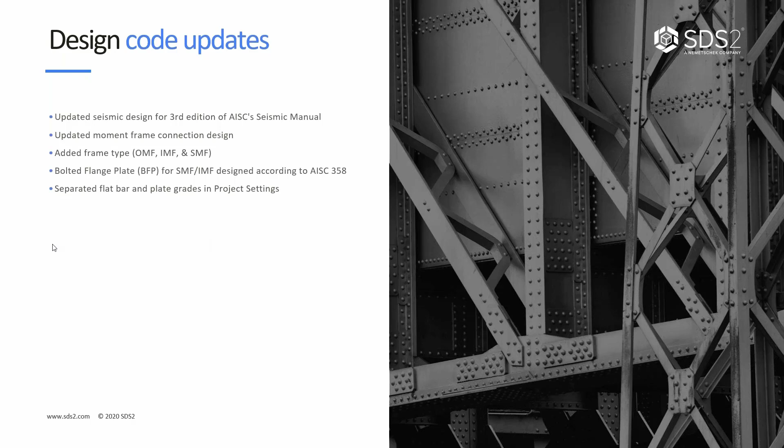They, or the EOR, will typically provide in the design drawings the size of the knife plate, hole locations, and different things like that. And then the shear plate to attach that to in the field and connect everything up is going to be provided by the fabricator.

So typically, the detailer is going to have to come up with that connection, maybe send it off for approval by the EOR, by Vulcraft, to do that. So not a ton different than your typical connection design, as far as sending stuff off for EOR review and the kind of collaboration and how you have to work with other parties there.

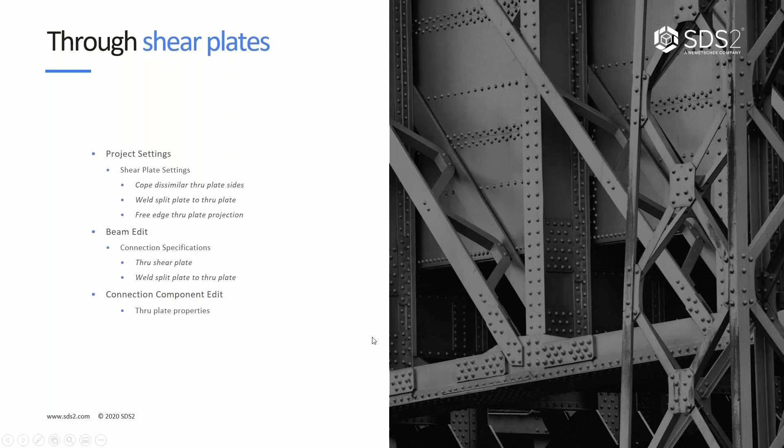be required. Typically when we see these inner flange plates, the reason for that is we can achieve a higher capacity connection because the bolts are now in double shear versus just a single shear plane. So that's typically why we would see those inner flange plates. Again, Colin, anything you'd like to add on this one?

The only thing I would add on this one is that if your two column section sizes do require fill plates on the inside of the flange, those will be non-bearing fill plates, so you'll see them set back a little from the end of the column. Okay, good to know.

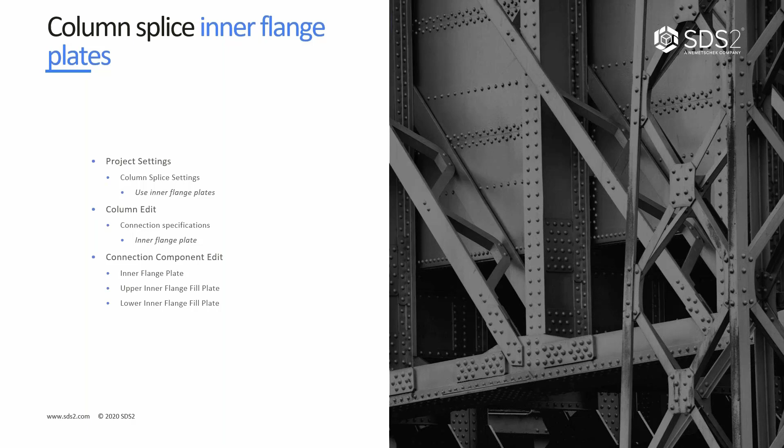Keep in mind here, in this situation, we are only doing shop welds. We don't support the field welds yet in this case. So if you do pick a combination of those settings that would result in field welds being required, you may see a failed statement. We've added several new failed statements to account for that and give you the information on why we're not doing those yet.

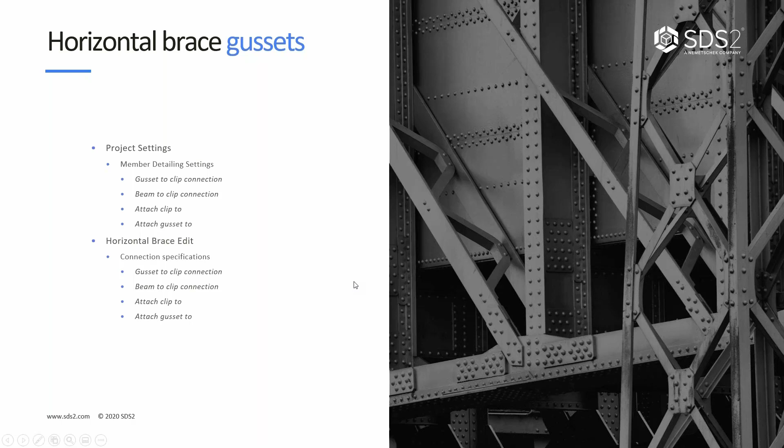One of the big things also that was an issue in the past was we were using an HTML format that, depending on the web browser you opened those calcs with, you would have potentially seen some formatting issues, and the formulas and such may not have looked 100% accurate. And that was limitations of your web browsers, whether it have been Mozilla Firefox or Google Chrome or which version of that you were using. With PDF, we can eliminate those issues and have eliminated those issues.

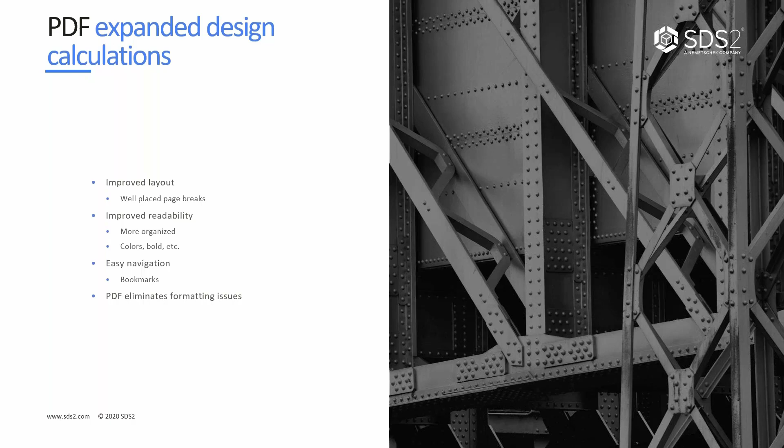So on to the live demonstration here now. Before I do that, Colin, anything else that I may have missed or you'd like to add here before we get to the demo part of this? No, I don't think so. Okay, very good. So I do have SDS2 open here already. I'm going to go ahead and grab that.

So first thing I'm going to touch on here is we talked about just some of the general things. I'm going to go into our project settings. And I mentioned that the plate and bar grades have been separated out. So what that means is when I go to my material grades and I were to look at my flat bar grades, in the past you saw a note down here indicating that it was shared with plates. That's gone now because it's not shared.

And if I just add something in here that's different than the out of the box, I'm just going off of memory here, so don't crucify me if I have my values wrong in there. I think that's pretty close. So let's say I add that A572-60 in here. This was for my flat bar grades. When I come down here to my plate grades, that is no longer included in here because these are completely separate tables, can be used completely separate for plates versus flat bars.

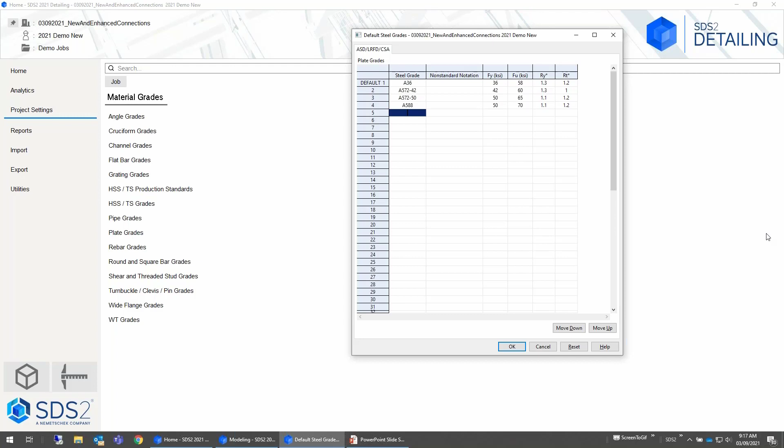So the plate and flat bar grades have been separated. Next thing on our list is talking about those flush framed joists. First I'm going to go into the shapes properties and show you what that looks like. When I open the shapes properties, I'm going to open my local shapes properties for this particular project. It's going to take a minute to load, as it typically does - there's a ton of information coming in there.

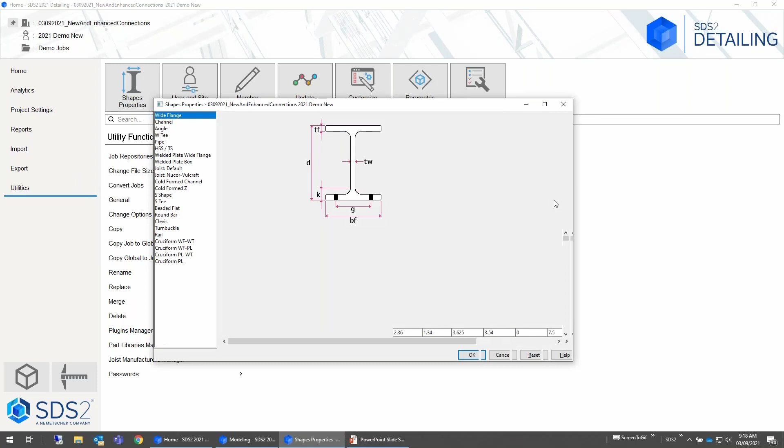What we're going to notice in here, in the past you typically had your joist type that you could select. So under my joist, I have the joist type. We've added now the CJ joist type in here to get that CJ series. If I do a find for CJ, hit next match, we can see these are included in here.

If these are not included in here, you may have to go into this joist properties file and run an import for a file that we do include. Let's see here - there we go. So we have a joist manufacturer's plugin folder. We go into the Vulcraft folder and we would import that joist properties Imperial file, and that would populate that material file with the CJ series joist that we have included so far.

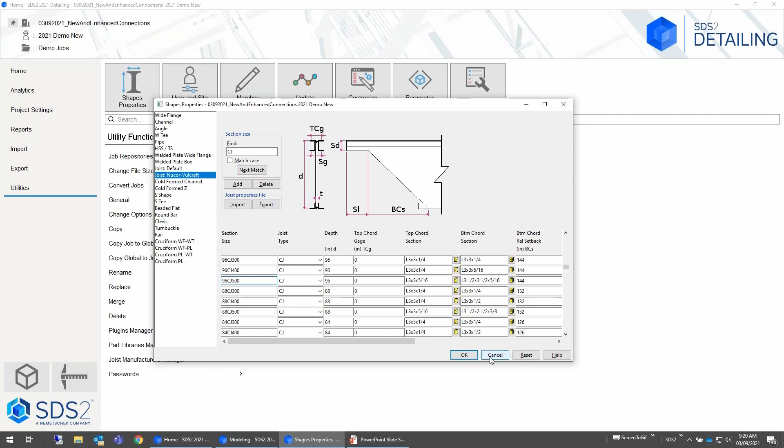Keep in mind, you do need to have the joist manufacturer set up properly in your project settings. So that's under modeling, joist manufacturers - I need to have the joist manufacturer set to Vulcraft within here. You can also set that manufacturer at the time you create your job. In the new job screen, there's the joist manufacturer option within there as well to get that done.

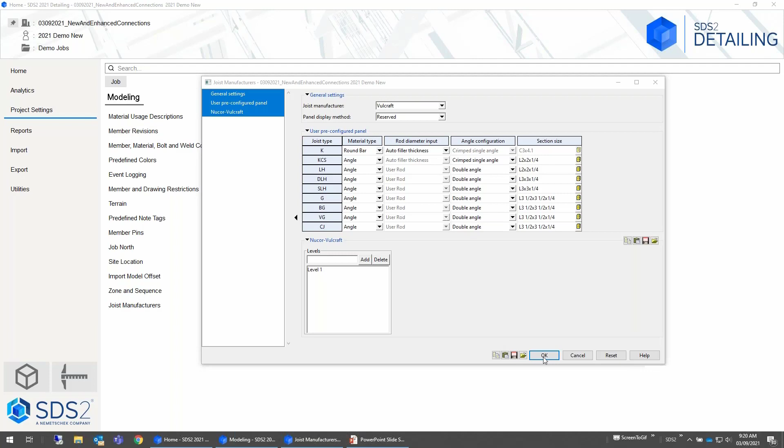If you don't see the joist manufacturer here, then in our utilities we have a joist manufacturers manager that we can use to move the valid manufacturers over to the job manufacturers to get that included in there as well.

Moving on then to more project settings related to this - in our bolt settings, new things that we've added: you're going to notice CJ joist bolts that we have in here. So we have a 3/4 inch by default A325N for the CJ joist bolts.

You'll also notice we have a flush frame joist connection in here. This one is set to 1 inch as the diameter by default - that's the preference of Vulcraft, so that's what we have set up there. And bolt type as well, we can change that. If you coordinate with Vulcraft, it's possible they may accept a different bolt diameter, but that is their current preference, the 1 inch bolts.

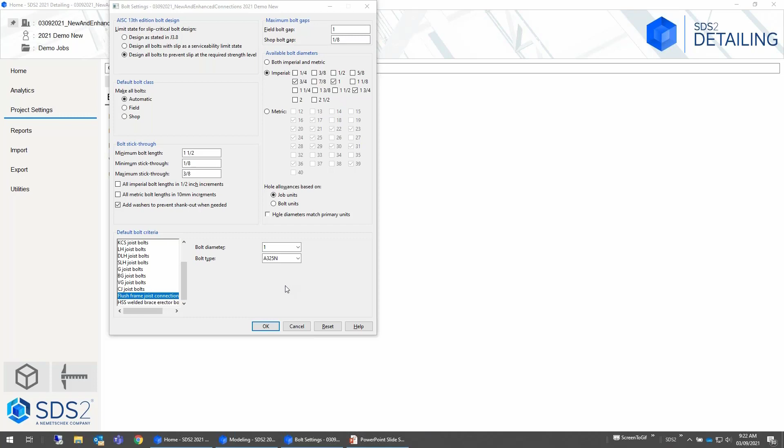Then the next thing we have some additional field clearances that have been added. So remember from yesterday's webinar, if I do a search in here and just type field clearance, I can come up with some field clearance keywords. Within the joist connections, you'll notice you have a knife plate field clearance now, so that's controllable there.

Also, if I clear my search here, in our standard fabricator connections under the joist connection settings, I have a full section for the flush framed connection. So you have your knife plate thickness, horizontal edge distances, minimum number of rows, top of steel - we can match that up to the connections in the design drawings that have been provided here to get those default options the way that we need them to be.

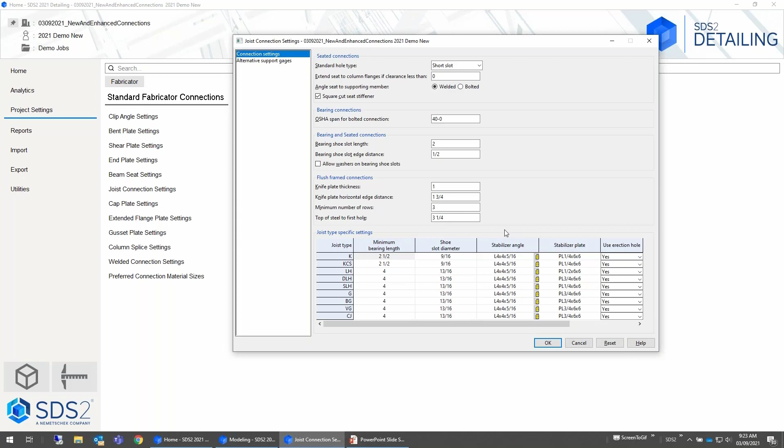So, okay, hopping into the model then to kind of show this a little bit. I have just a little bay over here, got a bunch of joists in there. First thing you're going to notice is I do have a CJ series joist in here, so we have that. You'll notice in the input connection type that I have that flush framed shear option.

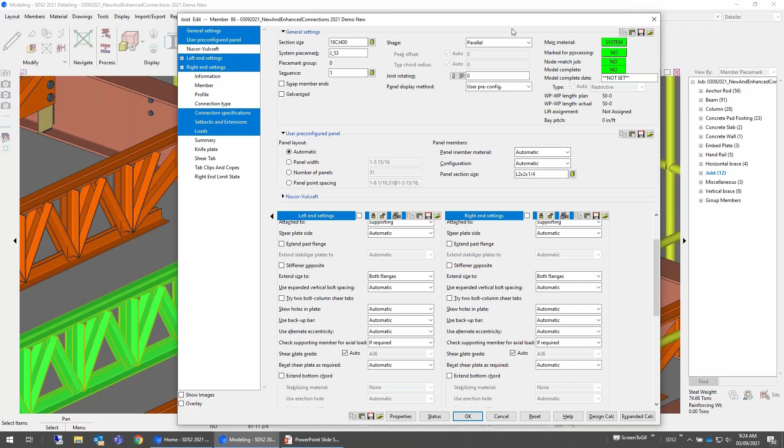When I do have that flush frame shear option selected in the connection specifications, I have all the same specifications as I would if this was just a regular beam shear tab. So we could, you know, add stiffeners on the opposite side of the beam we're framing to, different things like that.

One thing I do want to point out here is you'll notice that all these are full depth shear tabs. So when you pick your flush frame joist or flush frame shear connection type, SDS2 is going to set this extend size to both flanges by default. And again, reason for this is it is Vulcraft's preference to design that always as a full depth shear tab. So that's what we're defaulting to for that particular connection type.

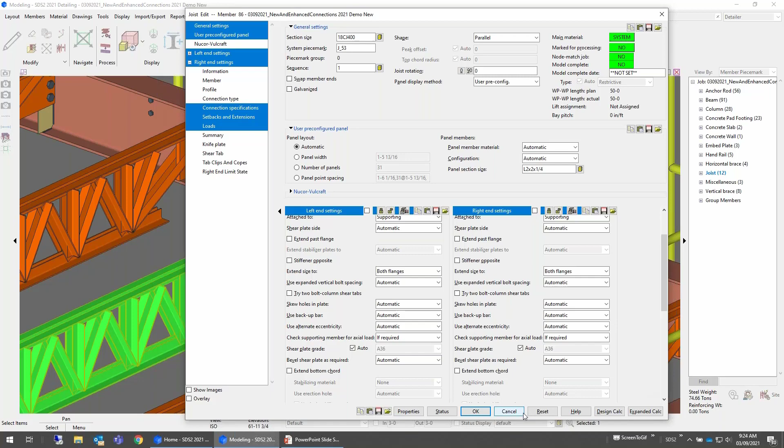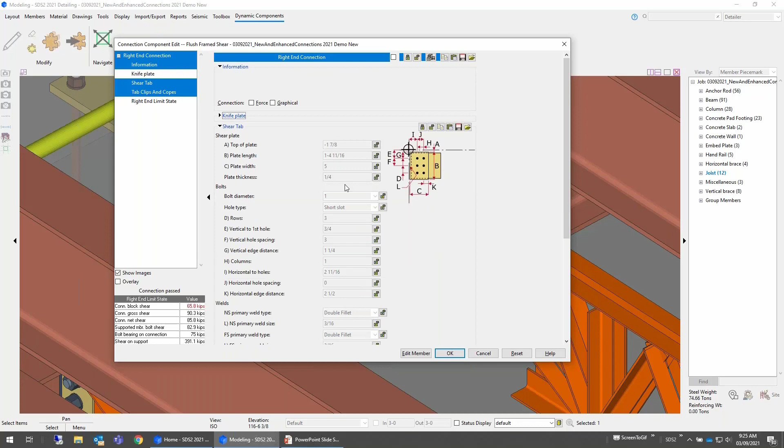And then also with that, if I double click on that, that is a component, connection component, just like other connections within SDS2. You have your knife plate settings. So that's, again, that knife plate that'll come from Vulcraft. And then we have all the variables for our shear tabs.

So if for whatever reason another row of bolts needs to be added in there, we can do so. Add 4 rows. I'm just going to change that one. We get a new 4-row connection. Can save that off as a user-defined connection if I need to, same as I can with any other connection there.

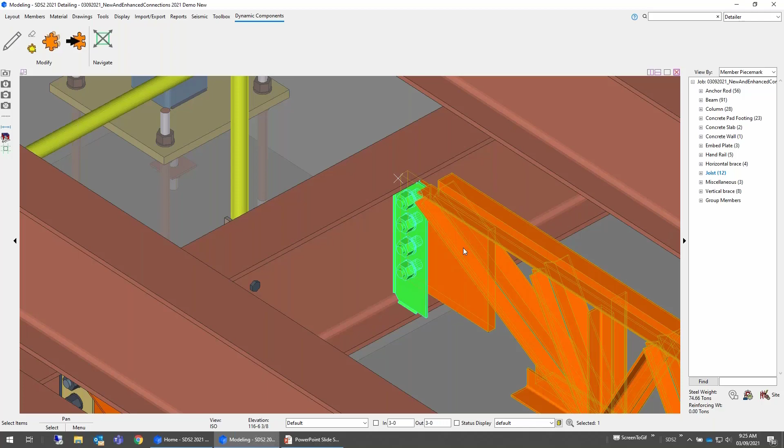And then also we are providing the design calcs with that as well. So if I hit the expanded calc here, I would get all the calcs there with that. So, Colin, anything I'm missing on the flush frame joists connections that is important you'd like to add in here?

Just point out that these are occasionally used to columns. So you do have the option to do the bottom chord connection as well. And you'll see some of those controls in the connection specifications. Okay, very good. So yes, I'm showing a joist to beam framing situation. We can use this in a joist to column situation as well, and it'll still get our bottom chord extended if we need, and the plates and everything at that bottom chord should we need that as well.

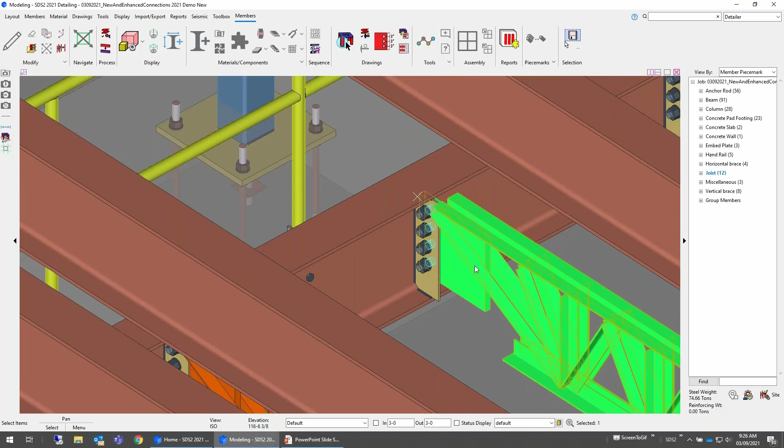So very good. I did want to point out, you showed those, I believe it was 4 fields on joist settings. Those can all be adjusted with lockables. Okay, yep. Whoops, if I would click the component, not the joist. So those are all still lockables within here, correct? So yep, just like other connections, you have your default setup in the joist connection settings, but then we can control those on a case-by-case basis here. That's right. Very good.

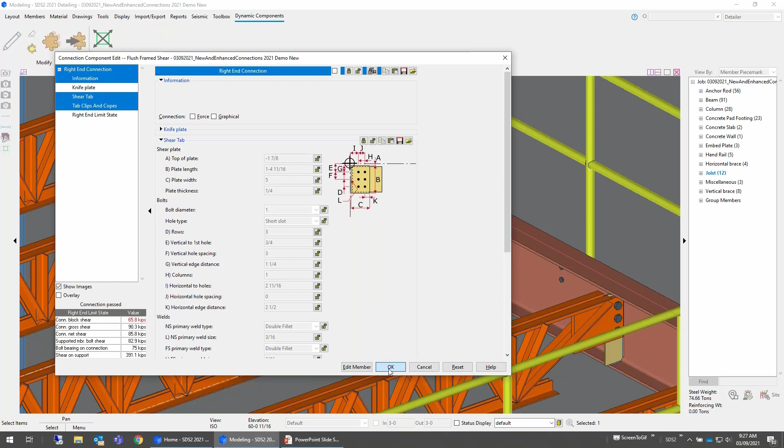So our next topic then is going to be the through shear plate. So I'll go back here to the home screen, come to my project settings, and I'm going to do a search for through, and we can see we have some different options there for through shear plates that come up as a result. It's all in my shear plate settings.

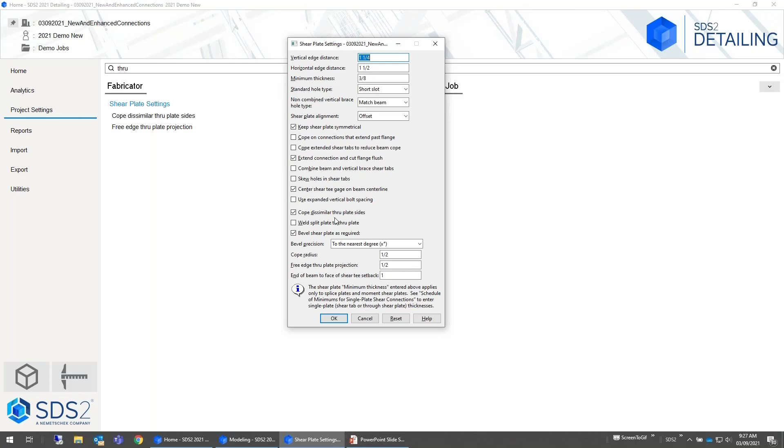So options in here that are new, this cope dissimilar through plate sides. So that's going to give us a cope versus a slanted through plate or beveled through plate. We have that option to weld the split plate to the through plate, as I discussed. We can control the cope radius and then the through plate projection. So how far past or through the tube that we want that through plate to project.

Again, this is something that we can control on the connection component edit. So we have a lockable for that, we can override the default setting as well, and we'll see where to get to that here in a minute.

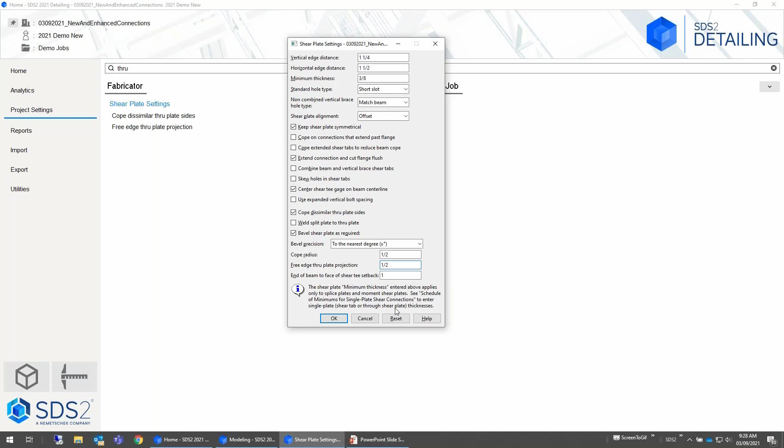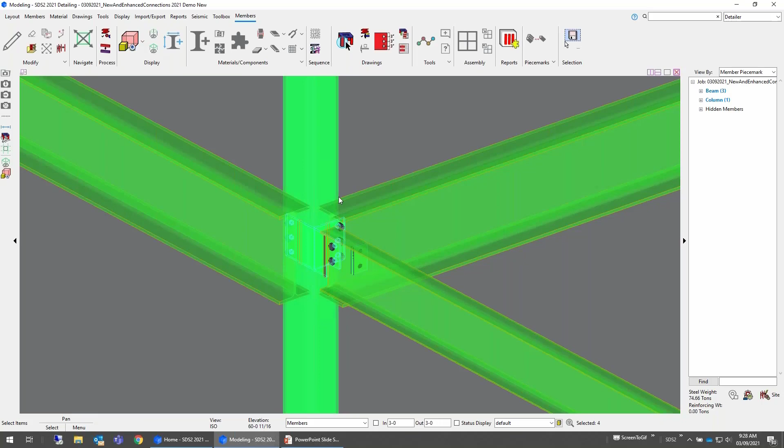So if I hop into modeling, I do have a situation set up for us over here. So I have a few different members here. I'm going to kind of isolate these from the rest of the model. So I'm just going to hide the unselected, and I'm going to make that a solid transparent so that we can kind of see through it.

So you can see, since I have that cope option turned on, we get the cope here on that versus in the past we would see a bevel cut come across here. So we're getting that cope. Our 1/2 inch projected past the tube, that was our default setting. So how far do we project this way?

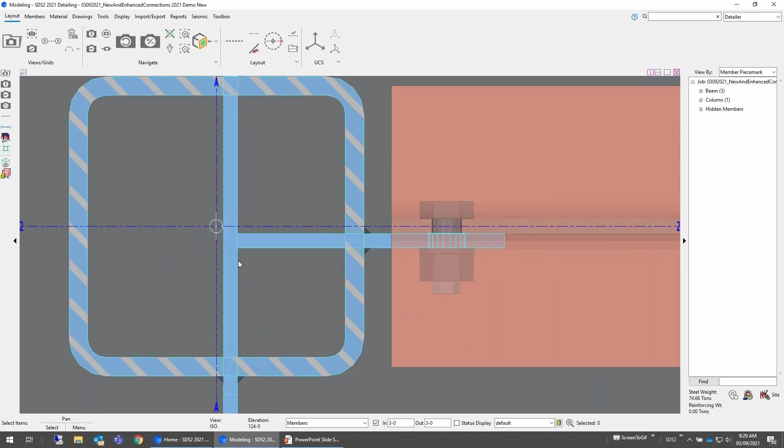And then you can see we have the through shear plate going through here, our through plate going 90 degrees, or what we call the split plate, is being terminated in the middle, but we didn't have that option turned on to weld it, so there is no weld being added.

In previous versions of SDS2, it was difficult to achieve exactly the results that I wanted. And the reason it was difficult is because the plates and the way it was determined how to add these was based on your member numbers. So, you know, the lowest member numbers, if I'm not mistaken, were typically given the through shear plate. Is that correct, Colin? Yeah, I believe that's true.

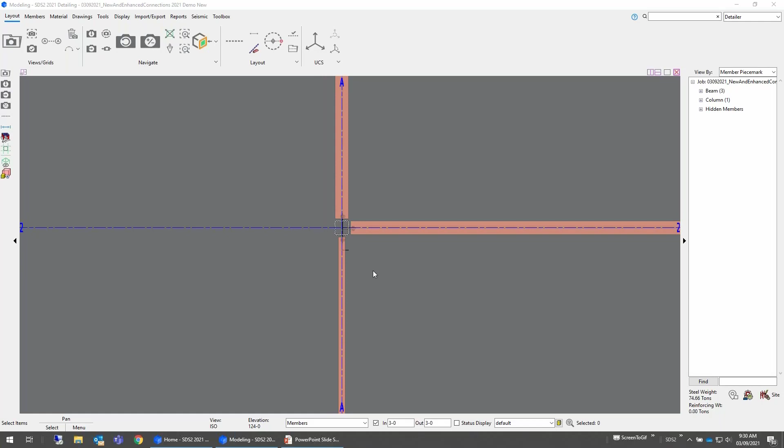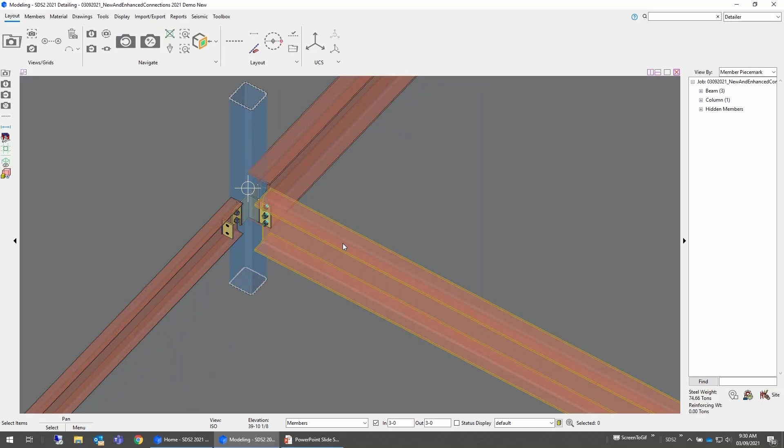Yep. So if I were to just turn on these member numbers here for us, just to kind of explain. So we have 281, 286, 345. In the past, it would have ended up this way based on order of operations, since the 281 was the lowest. But if I wanted this particular plate running perpendicular here to be a through plate and then these to be split, I would have had to probably re-input the beams or model the whole thing over. So now we don't have to do that.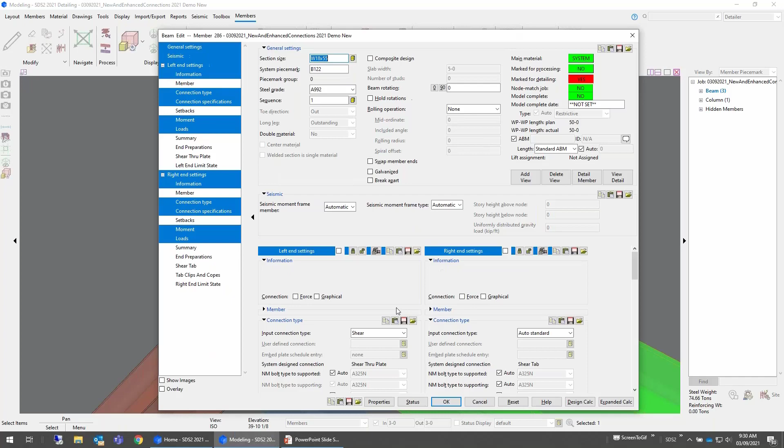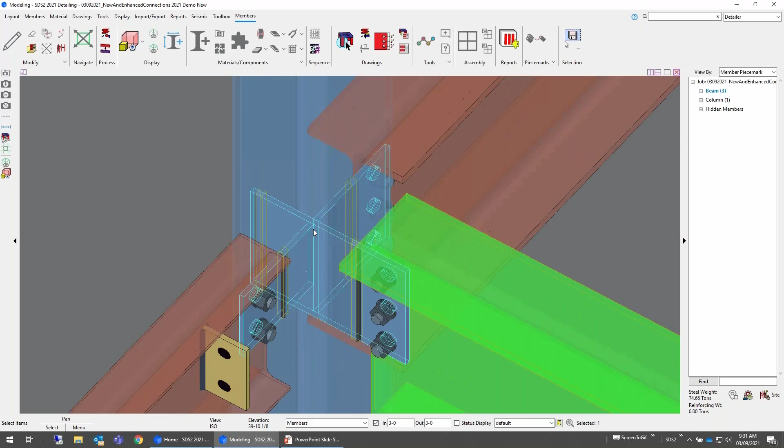If I want to get this one to go all the way through, I come into my beam edit, and I had to drag it here across because I had it on my second screen for some reason previously. You'll see this through shear plate option in here, and I have no, split, and through. So you see I have it set to split. I'm going to set that to a through plate and say okay. So now you can see that goes through that tube.

The other two are split. We don't have to cope that one now because it's not being shared all the way across. Maybe simpler for us there in that case. And then again, no weld going there. So you do have to watch out a little bit. You do have that option within every beam edit window for that through plate. And if you want to split it or go all the way through, you just have to be careful that you have the right combination.

SDS2 does in the background try to resolve that if there's conflicts, but there's always going to be a certain combination that you can potentially get where we might not be able to resolve that, and you could see a failed message. So just be aware it's in every beam edit window, and conflicts can potentially arise based on how you have them set.

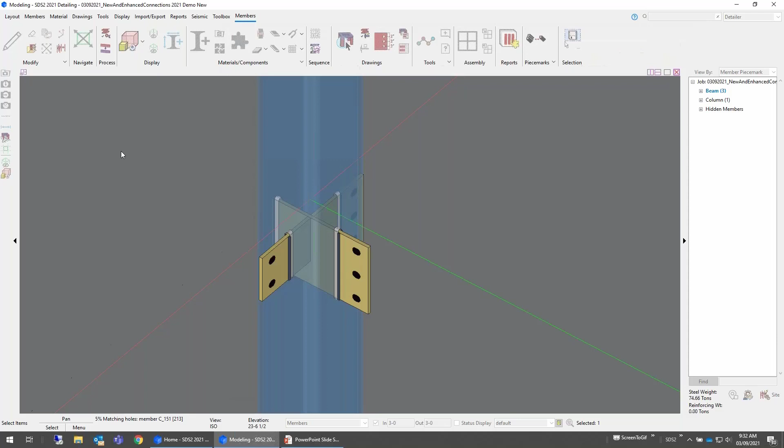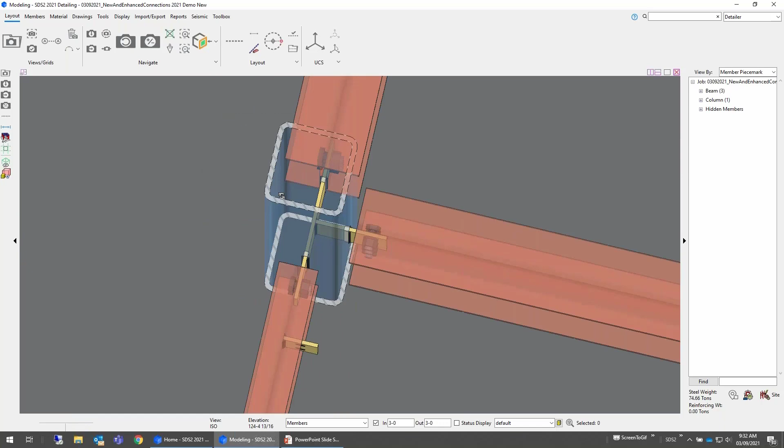So we talked about the cope, we talked about welding here. You probably also noticed in the connection specifications that the weld split plate to through plate is just below the through shear plate option. So I can set that to yes, and we are going to see a weld now in the center of that. So in the middle of the column like that, we're probably going to have a difficult time doing that unless we were to split that column or do different things like that.

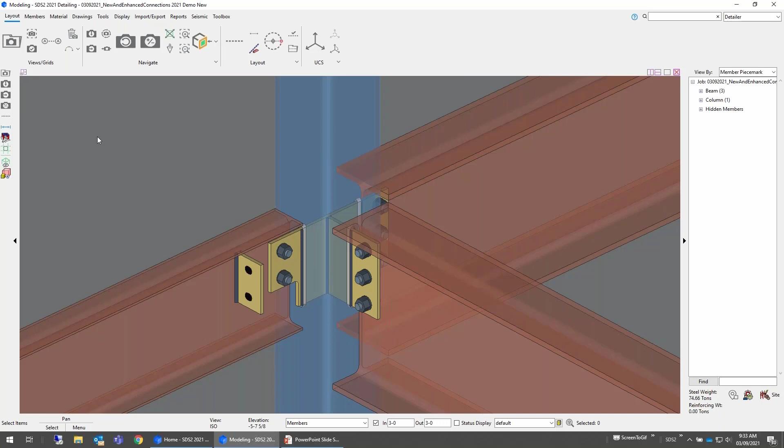That's not something SDS2 does today, so just be mindful of that. There may be some additional work even though we have that going in there. So depending on the situation, you may or may not want that weld done. By default, we have it turned off.

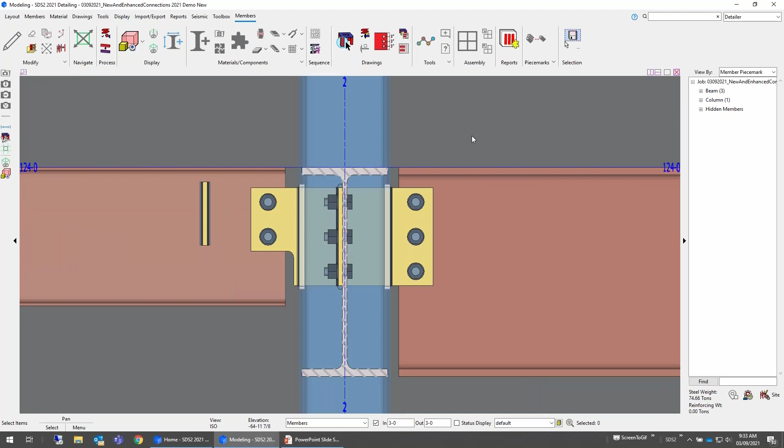And then finally on the through shear plates, if I snap to the surface over here again and zoom in, that is a connection component again that I can edit. I can see all the variables, all the lockables within here. Under my tab clips and copes, I have my through plate properties. So if I scooch this over so we can see the preview, we have that free end.

So here's my projection. So if I change that to 1 and hit tab, notice that increases the projection past there since it's shared and coped. That whole thing moves out. It's going to potentially affect the field clearance and setbacks on that beam there.

Here's our cope versus clip. It's kind of hard to see because it's in an opaque form here, but that changes that to being the old bevel style versus the cope. And then your cope radius, of course, would control our radius here in the cope. So some different variables, different lockables that we have available to us in the through shear plates there.

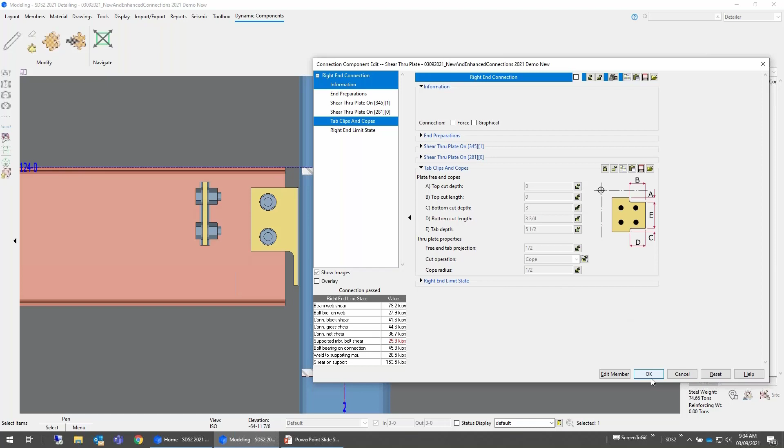Colin, anything that I've missed here, anything important everybody should know about that I may not have covered there? Well, I would just add that if all of these happen to be set to through plate, then the system would default to the old behavior where the through plate would be based on member number again, with one exception. If one of the through plates was deeper than the other, then that would be the one that would be prioritized, and it would remain a through plate while the others would become split. Okay, very good. Good to know.

Next topic then is going to be the inner flange plates on our column splices. So if I move over here to a little different portion of my building, I already have this set up so we can see the inner flange plates there being added to that column. Again, I may just go ahead and turn those to a solid transparent so we can see a little better. So there are the project settings relevant here.

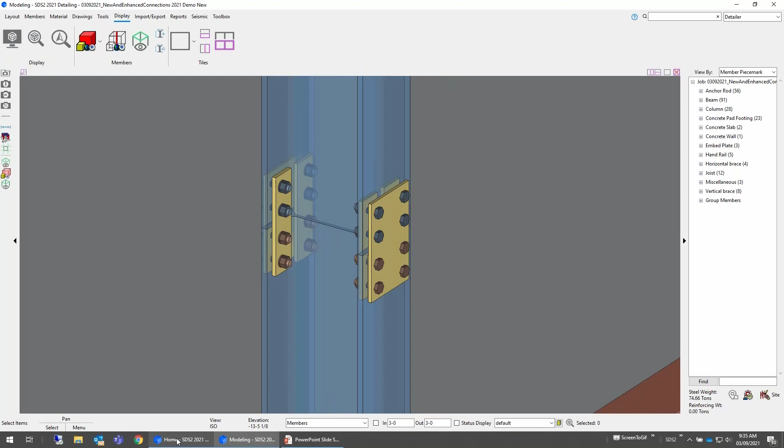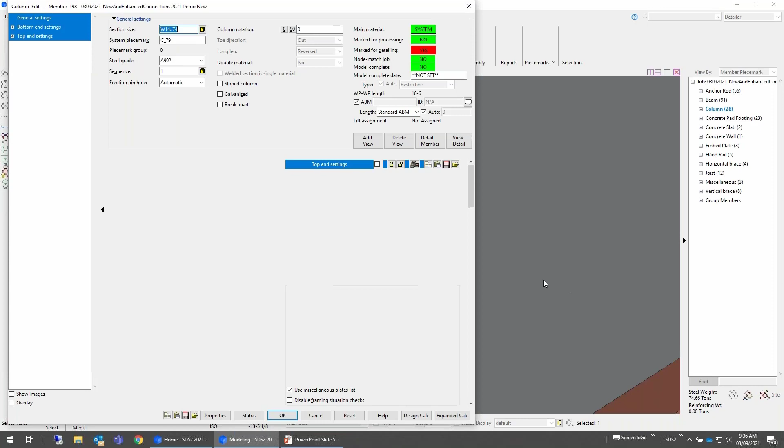So in standard fabricator connections, under my column splice settings, I just simply have that checkbox to use the inner flange plates. So I've turned that on. That's what I'm getting out here. You'll also note that I have a splice plate set for that connection type. Under my connection specifications, you'll note that I have the control within here to override that on a case-by-case basis also.

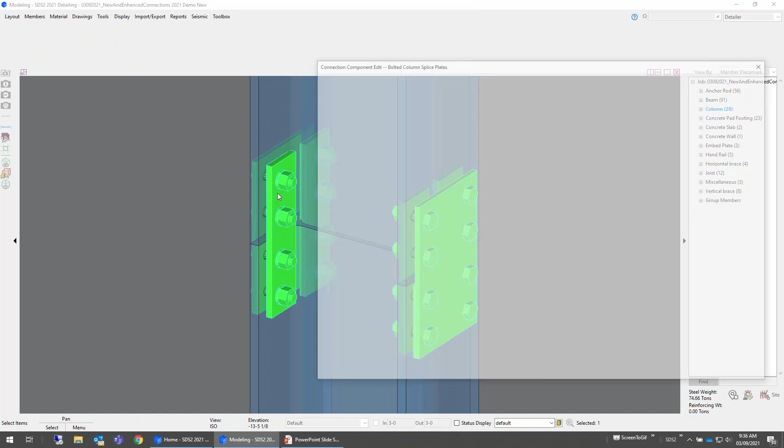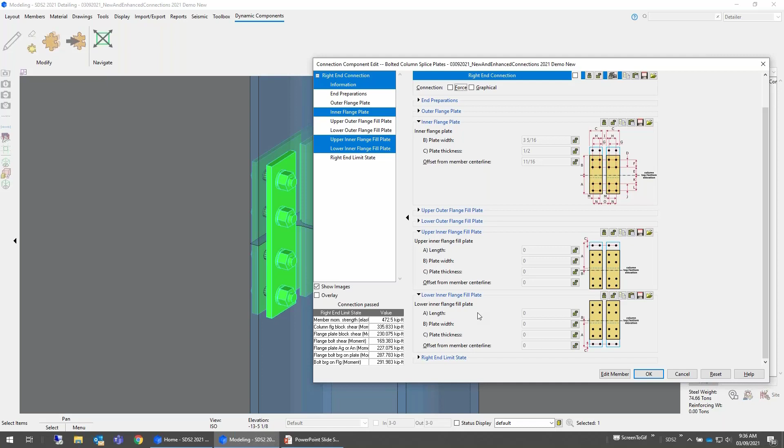And as we mentioned, when I double-click on that connection component, we have the inner flange plate leafables to control the sizing of that plate. We also have the fill plate options for the inner flange plates there if necessary as well. So that's what we have for inner flange plates today. Anything important on that one, Colin, we should know about? No, I don't think I'd add anything to that. Okay, very good.

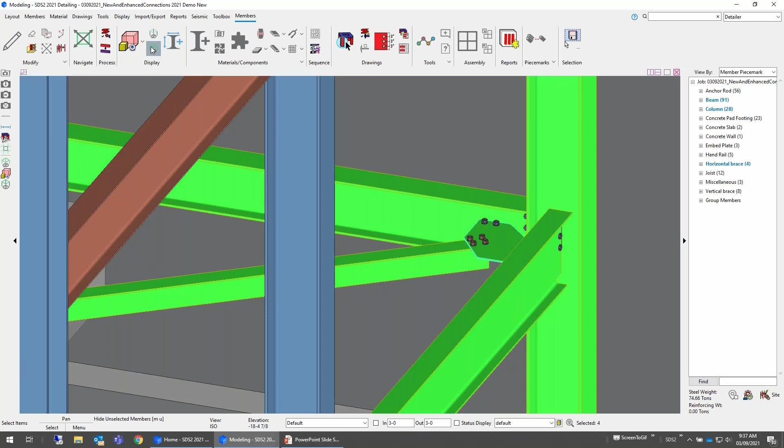And then our last portion of the connections themselves we discussed, and you saw on the agenda, was for our horizontal bracing. So I'm going to go ahead and kind of isolate this joint again. Grab my transparent here so we can see kind of what's going on. So we talked about more control over how the clips are attached to the beams, how the clips are attached to the gussets, what's shipped with what.

So we see here a combination that we probably couldn't have gotten in the past. So we have a welded clip on both of the beams, both the supporting members. And then we have a gusset that's shop attached to the brace, bolted to those clip angles. So now in the field, we can just set this down on the clips, bolt it up, and away we go. So this wouldn't have been a combination we could achieve out of the box in the past.

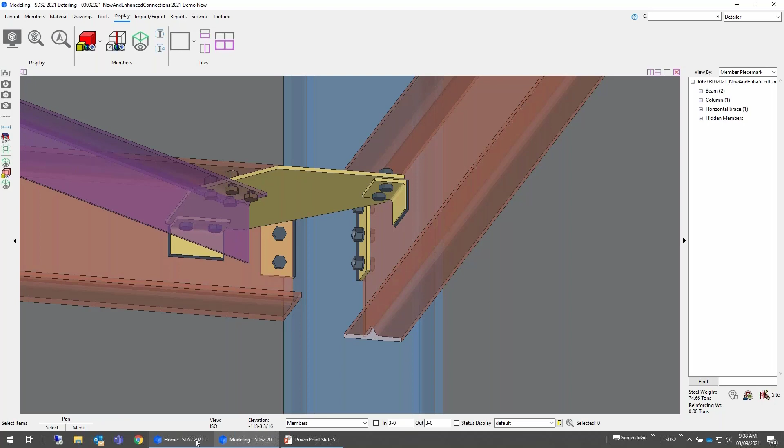If we look at the project settings for that, that is actually under our member detailing settings for the horizontal braces, and we have those options under the clip angle connection of gusset to supporting member. So we have a gusset to clip connection. So how's the gusset plate attached to those clip angles? They're bolted. Beam to clip connection is welded. I have the attached clip set to be attached to the supporting, or the beams in this case, and then attach that gusset plate to the brace in the shop.

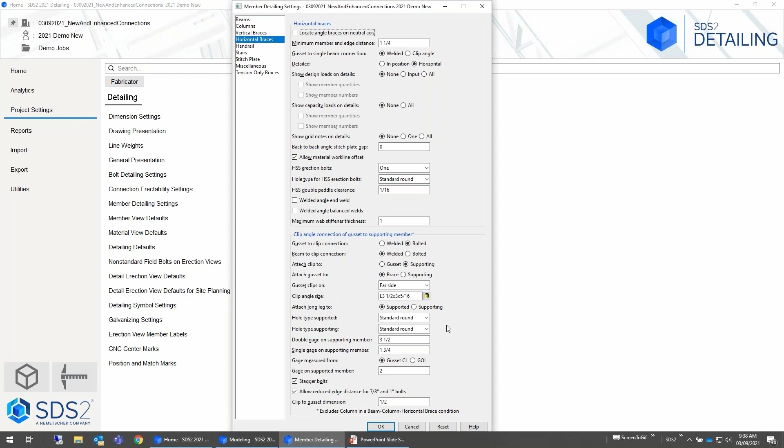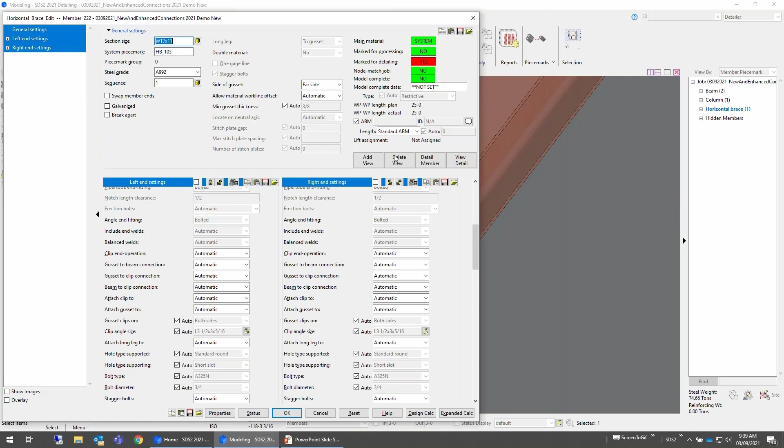So again, that's what kind of gives us that combination or that scenario. You also have control over that within your horizontal brace screen. So under my connection specifications, I can override that with the gusset to beam, gusset to clip, beam to clip, and attach clip to options down here as well. So I can override that on a case-by-case basis. Maybe if I wanted those beam to clips bolted instead, I could go ahead and get a bolted clip there instead of the welded, as we saw.

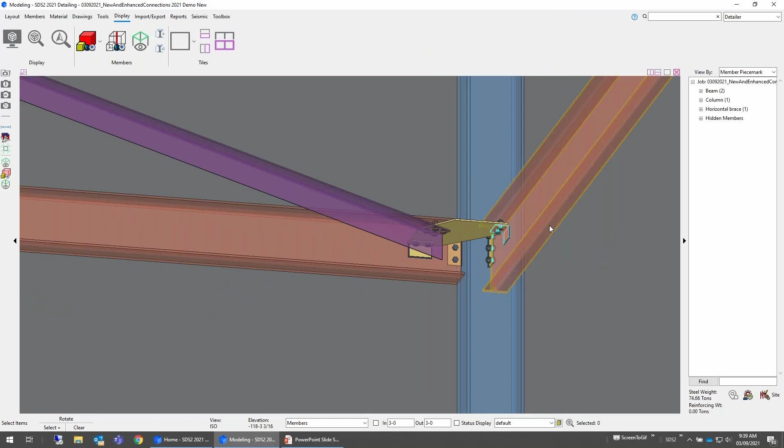Okay. Finally, then, we'll just take a look at some PDF design calcs. So what that new layout looks like, why that's important, what we've done with that. So I'm just going to run a simple connection here. It doesn't have to be anything fancy.

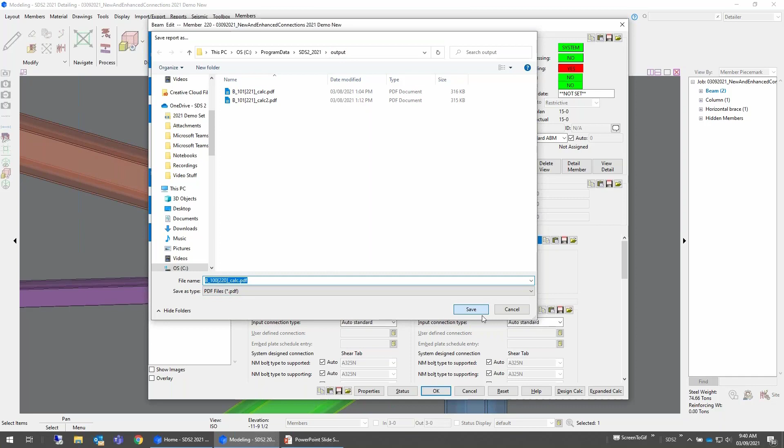The first thing you'll notice when you run the expanded design calc today is that we get a screen come up to actually save a file. So we're doing this slightly different than we had in the past. We kind of just created a temporary hidden file in the past. Now we're going to ask you where you want to save that and output that to. So by default, it's just going to my output folder, and it's going to go ahead and run that calc.

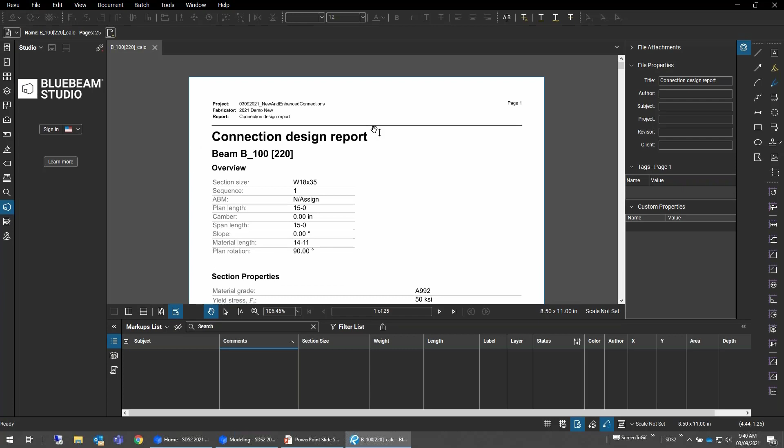So as it does this, remember, more layout, better readability, more bookmarking for easier navigation. It'll go ahead and open with your Windows default PDF viewer editor that you have set up. You can see mine is set up to run with Bluebeam. And when we get that, I'm just going to zoom out a little bit here. So again, some different formatting, better layout, page breaks. After this first section, we get a page break before we start the left end information.

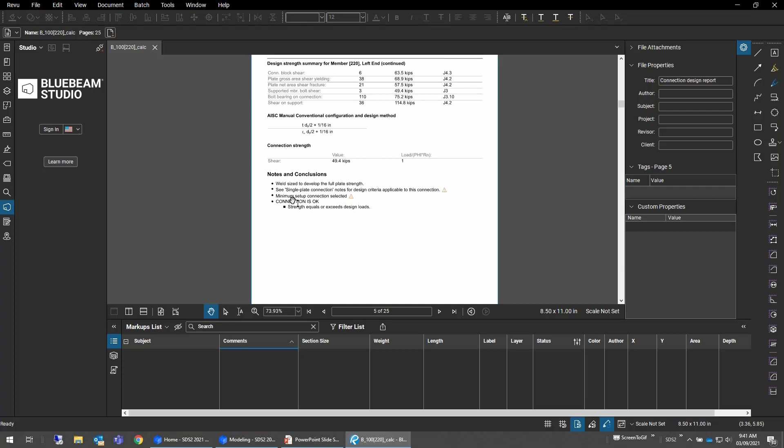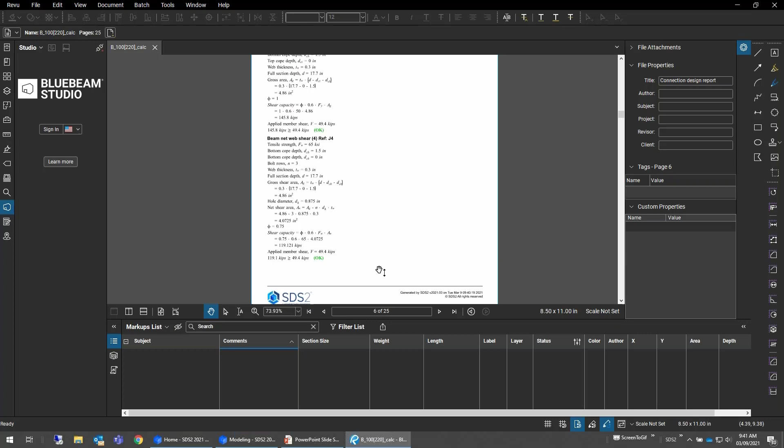You're going to notice when we get down to some of these things where there's important information, you may see some coloring. Down on your expanded calcs, you'll see green if everything's okay. You'll see red if it's not good or hasn't passed. So you'll notice that information. If I go to my bookmarks, we have a table of contents here. I have my Beam B100 and all sorts of bookmarks.

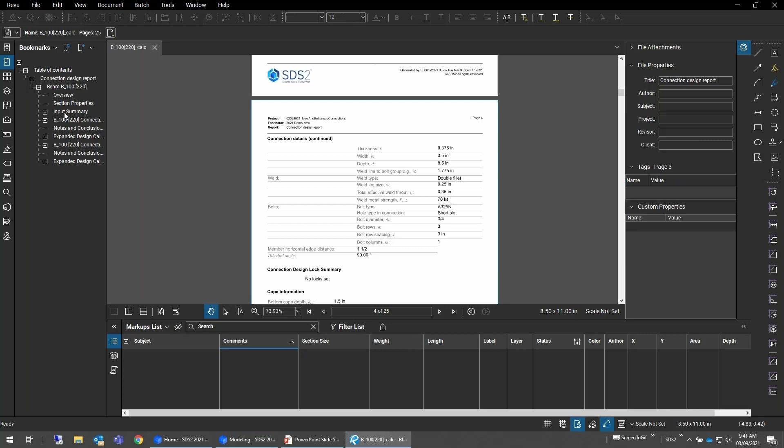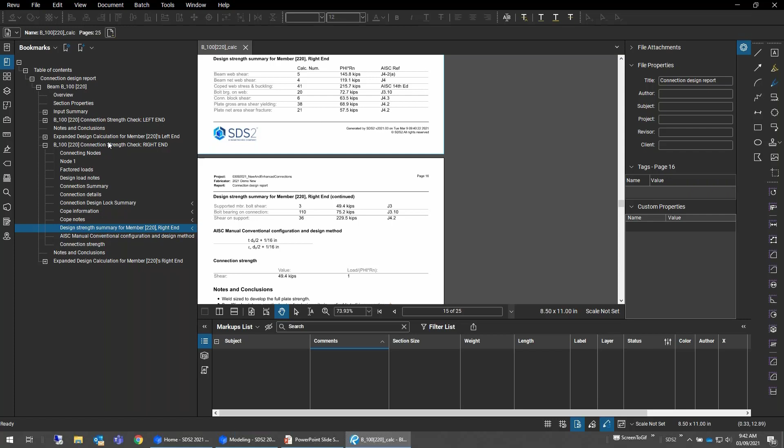So if I just want to quickly go to the connection strength check for the right end, boom, I hit it, there we go. I can expand that even further. If I want to go to the design strengths for that right end, there we go, right there. You'll notice that the right end always starts on a new page. So there will be a page break right after the expanded calcs of the left end, and then our right end is going to start on a new page.

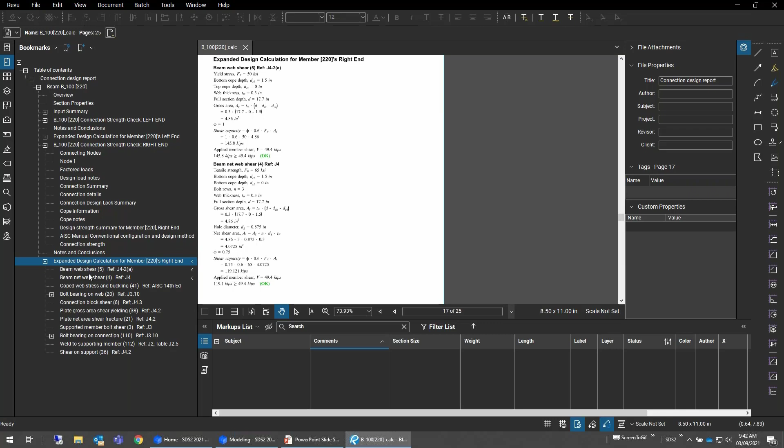And then I can quickly go down to the expanded calcs, and each individual expanded calc is bookmarked for me to get to as well. So a lot easier to navigate, a lot easier readability, and we eliminated formatting issues with all of this.

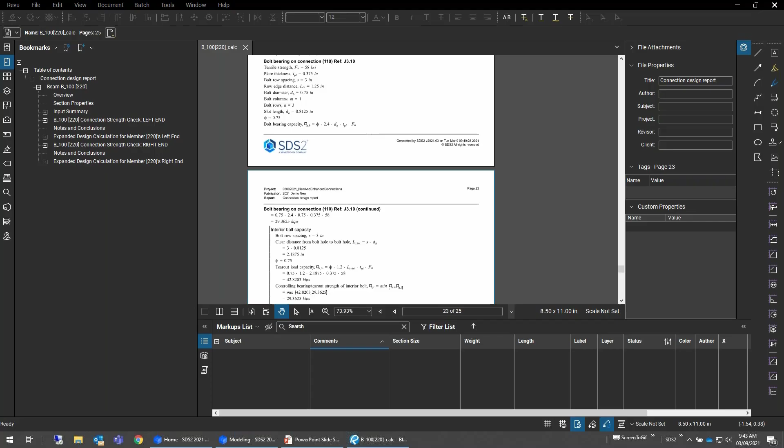We do have some different poll questions that we're interested in as well. So the first one is to do with those flush frame joist connections. We're going to launch a poll asking how many projects you have done in the last year that require those flush frame joist connections, to get a feel for who's using those to begin with. And I'm going to take a look at some of these questions also. I want to leave that poll up for a minute or two to give you time to answer.

So looks like there's a decent amount. We got 0 to 5. Some of you have worked on 10+ projects in the last year that require those flush frame joist connections. So that's interesting.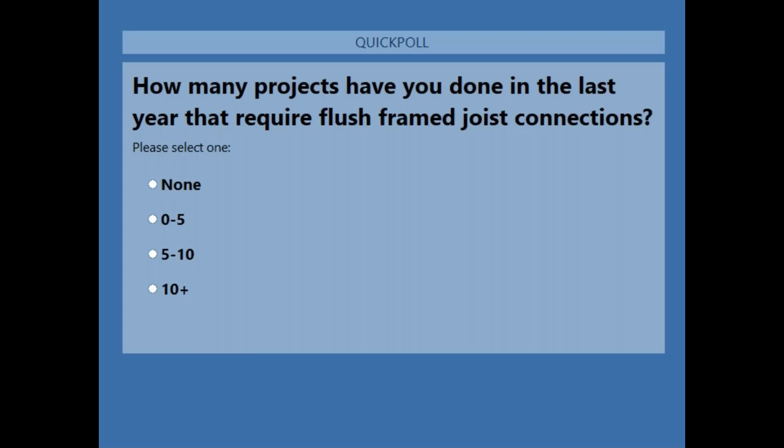So here's a good question on the through shear plates. Do the through shear plates work for beams with greater web thickness differences? So we do handle the different web thicknesses in that case. If I come back over here and take a look at the situation I have set up, I believe the thicknesses in this particular case are not far enough off, but if they were, you would see a fill plate on one side or the other.

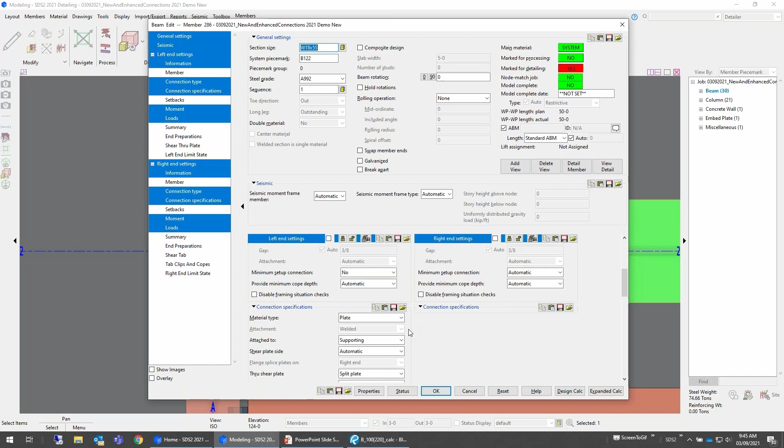You can actually see, when I changed this so that my through plate goes through there, that these other plates are offset a little bit, and that's because of the difference in the web thicknesses. So yes, we are handling that where the web thicknesses differ on the through shear plates.

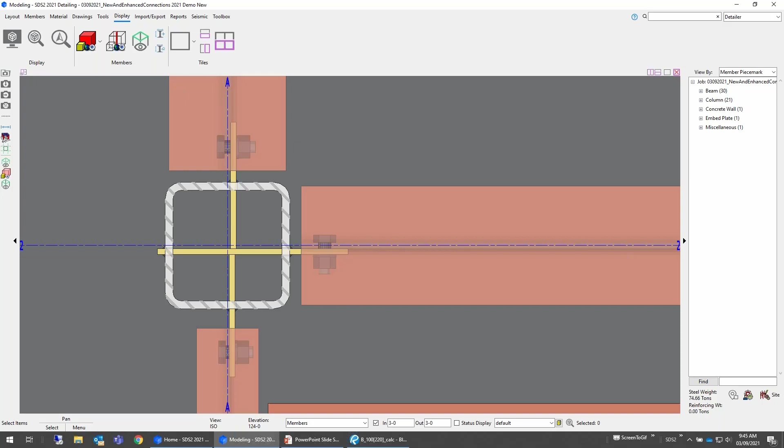Did we share the poll results with everybody? So here are our poll results on the flush framed joist connections. A lot of you aren't seeing those projects at all. Some of you are seeing 0 to 5. Some are hitting the 5 to 10 or 10 plus mark there. So that's good.

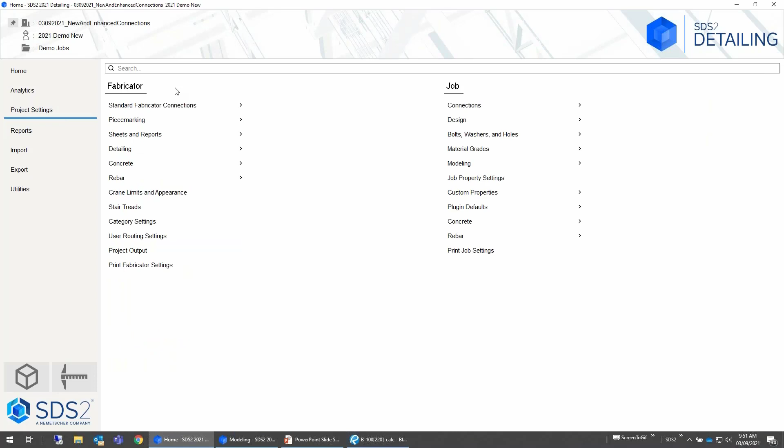That's the last poll we have. So I'm just going to hop over to my project settings and talk about the preferred material sizes I was just discussing, under our preferred flat bar sizes. If there isn't a flat bar in this list, SDS2 wouldn't be able to match your plate up to anything in here. So that's how you would prevent that from happening, is to clear that list out.

So let's see. We're not doing a shear through plate at a brace gusset yet. That's something that still needs some work before we're able to do that. I see that question several times on here, about a through plate where we're framing into a beam with a brace and a gusset.

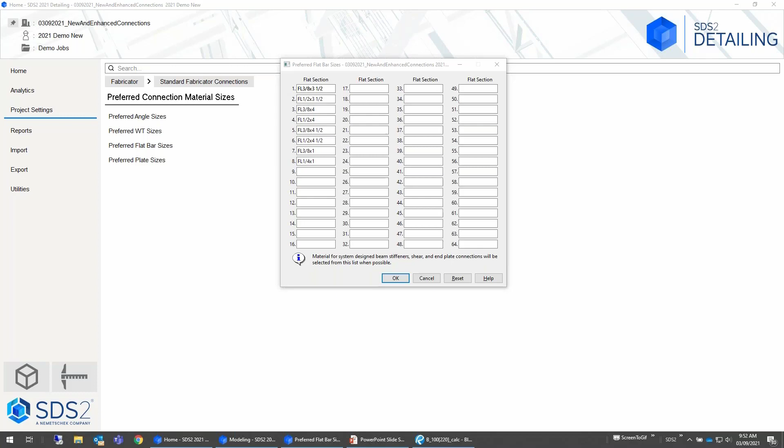That particular question right there is a majority of your guys' questions: a shear through plate for beams with elevation difference. I do believe that we handle that to a certain point, to a certain extent. If those beams had a little bit of elevation difference, I believe we would handle that to a certain point. Would that be correct, Colin, or do you know off the top of your head?

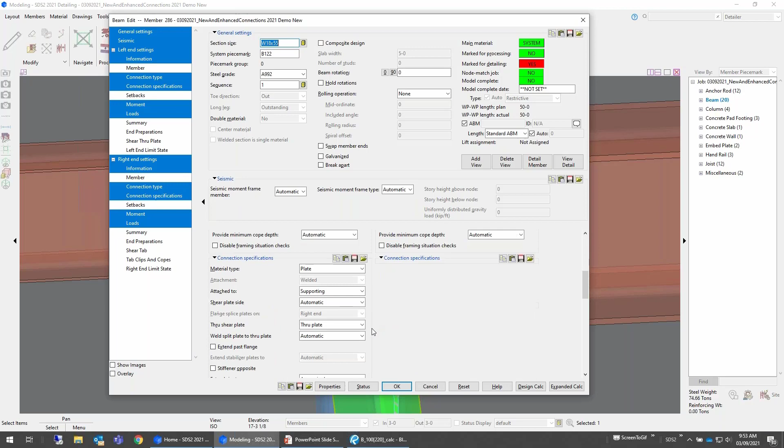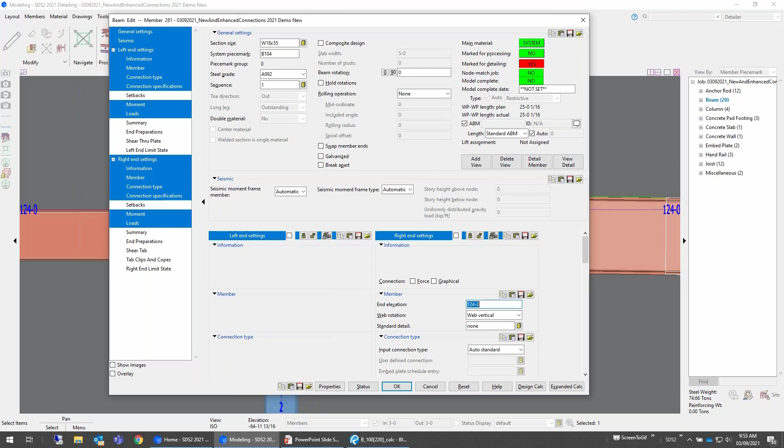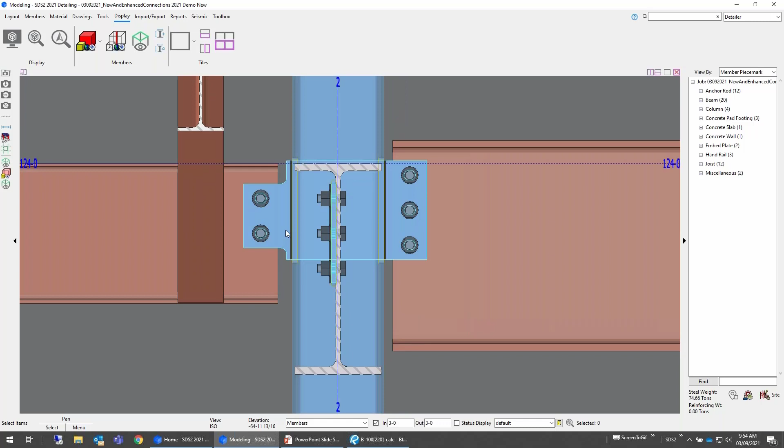That was something that we didn't do any work on specifically, but I believe it is handled to some extent. Let me just try it out here and see what happens. We'll go up, say 4 inches, and see what happens. That might be a little bit too much for us to handle. So yeah, in that particular case it is a little bit, but I seem to remember handling this in the past to a certain degree - I'm kind of going off of memory here. So I did a 2-inch difference there, and it is able in that particular case to handle that through plate. But there is probably a threshold somewhere where we're not able to.

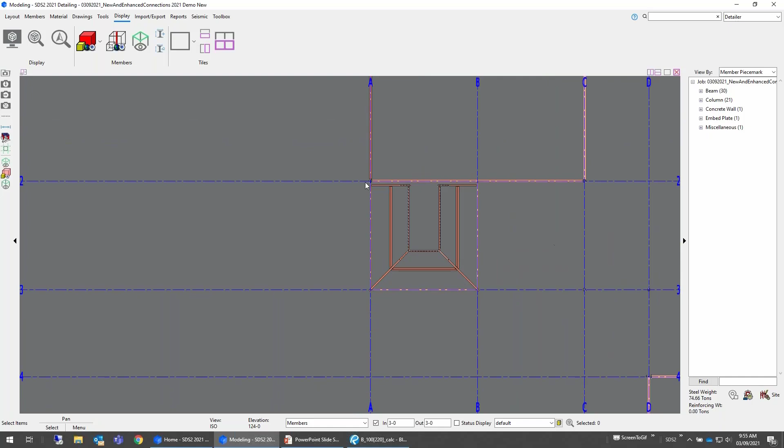Rotated columns: if this column was rotated, we will handle that again to a certain extent if memory serves me. I do believe there's a certain threshold here where maybe the slots aren't quite right once we get to a certain point. So yeah, we do see here in that rotated column, we got the through plate, we got the slot, same as over here. So yeah, we do handle those rotated columns as well.

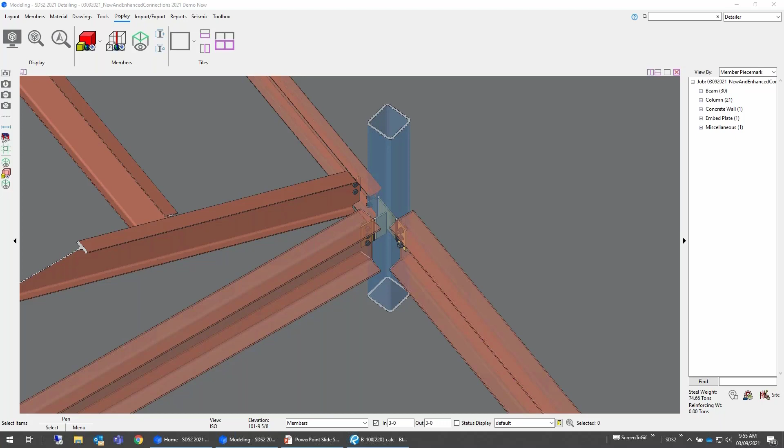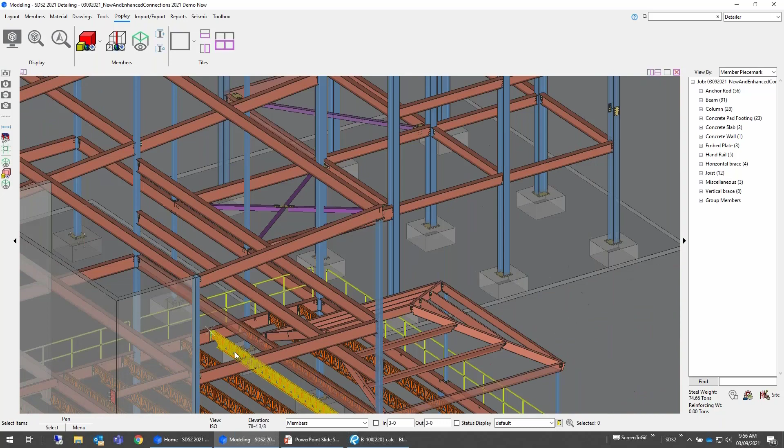There's a question here on angles for the flush frame joist connections. So instead of doing a plate here, sometimes we will see an angle in that particular case - something that we don't have done yet, but we're looking into it a little bit. So again, something you might see in future versions to get an angle there instead of the plate.

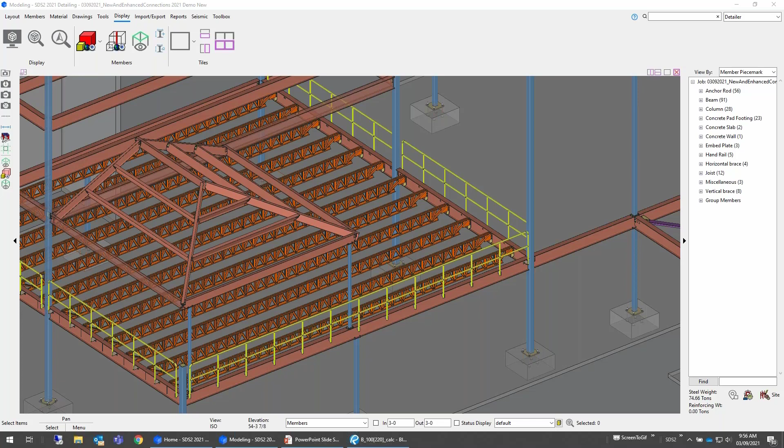Questions are slowing down a little bit here, so I'm just going to flip over to my PowerPoint, if I can find it again. Let's go here - I may have closed my PowerPoint. Nope, there it is. All right.